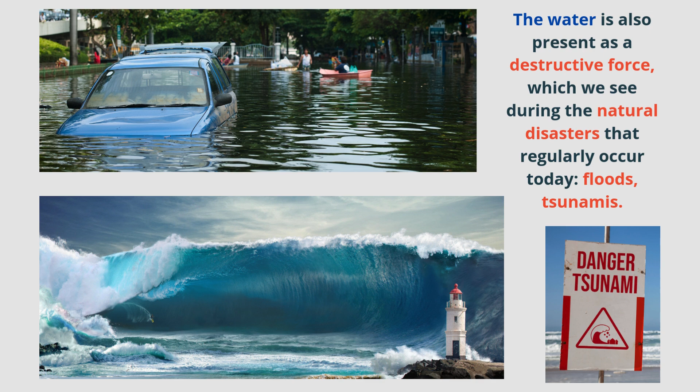The first civilizations developed next to water because it was used and is still used today as food, as an agricultural and industrial auxiliary material, and as a source of energy. The water is also present as a destructive force, which we see during the natural disasters that regularly occur today, floods, tsunamis. So man's relationship with water is twofold: to use the opportunities it offers and to protect against the threats it poses.

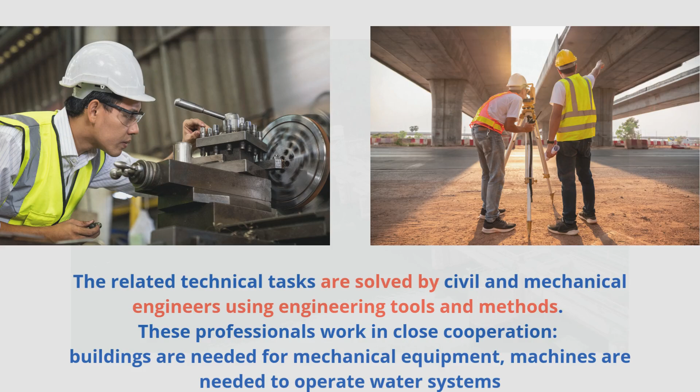The related technical tasks are solved by civil and mechanical engineers using engineering tools and methods. These professionals work in close cooperation. Buildings are needed for mechanical equipment. Machines are needed to operate water systems. Engineering work continues with the design of networks, artifacts, mechanical equipment, and buildings. They have to be built, assembled. The completed systems have to be operated, checked, maintained, and renovated. Engineers also carry out the research and development of new technical possibilities.

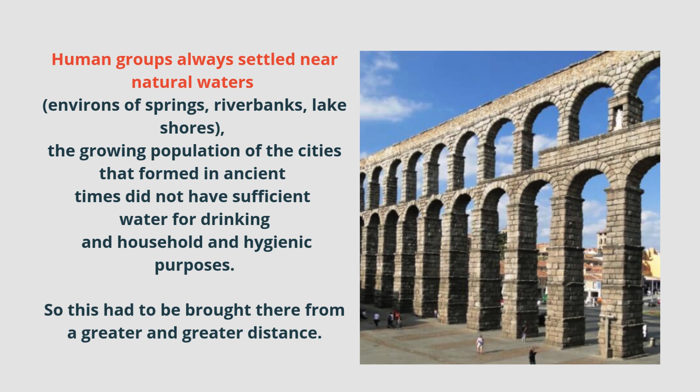Human groups always settled near natural waters, environs of springs, riverbanks, lake shores. The growing population of the cities that formed in ancient times did not have sufficient water for drinking and household and hygienic purposes, so this had to be brought there from a greater and greater distance. The aqueducts built by the Romans can still be seen today.

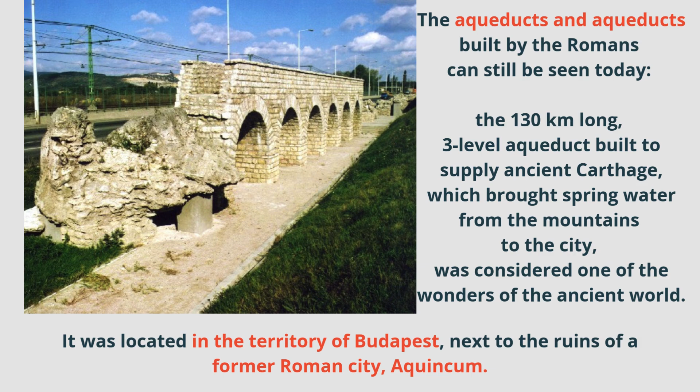The 130 kilometers long, 3-level aqueduct built to supply ancient Carthage, which brought spring water from the mountains to the city, was considered one of the wonders of the ancient world. It was located in the territory of Budapest, next to the ruins of a former Roman city, Aquincum. In addition to transporting fresh water, wastewater had to be removed. The remains of the first built sewer system, the Cloaca Maxima, Rome, can still be seen today.

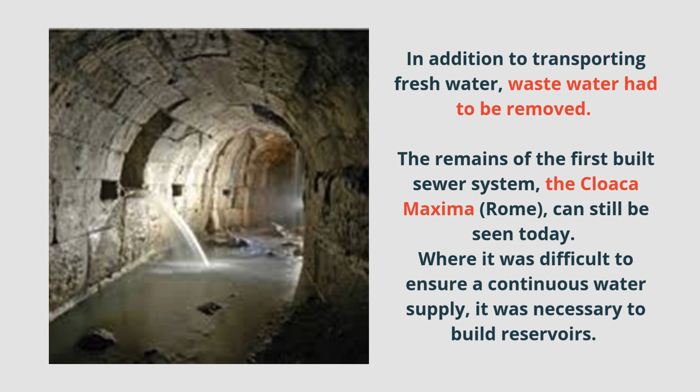Where it was difficult to ensure a continuous water supply, it was necessary to build reservoirs. Here, in addition to the architectural tasks, protection against leakage also had to be solved. The first such structures were the huge cisterns of the Masada fort on the shores of the Dead Sea, or the Chand Baori in India, which is a 13-story stepped storage well. At that time, no machine helped the water reach its destination. It was ensured by the properly designed slope of water pipes and canals under the influence of gravity.

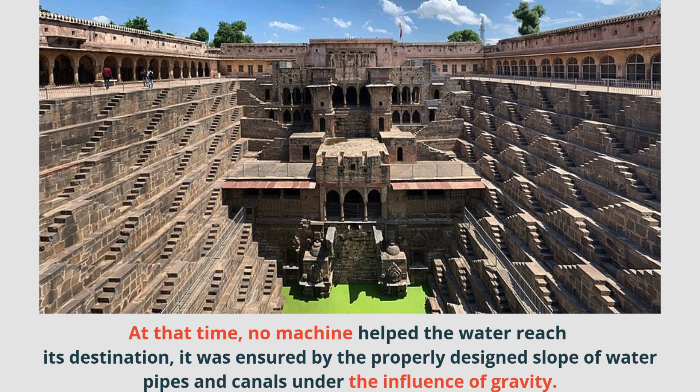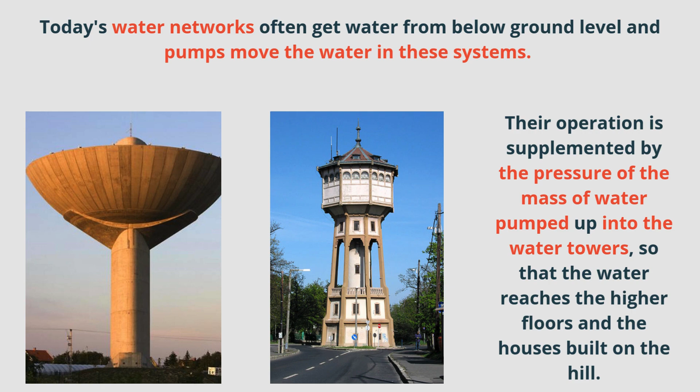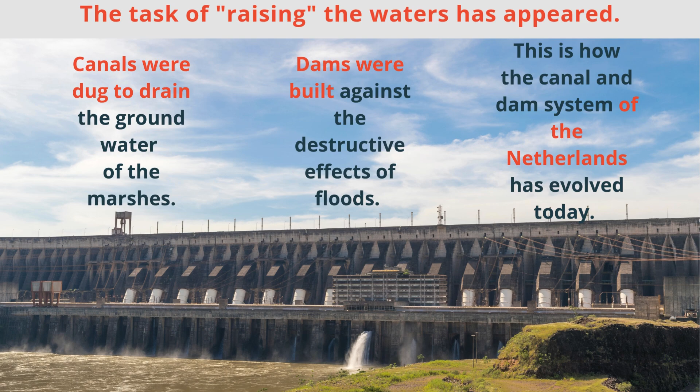Today's water networks often get water from below ground level, and pumps move the water in these systems. Their operation is supplemented by the pressure of the mass of water pumped up into the water towers, so that the water reaches the higher floors and the houses built on the hill. The task of raising the waters has appeared. Canals were dug to drain the groundwater of the marshes. Dams were built against the destructive effects of floods. This is how the canal and dam system of the Netherlands has evolved today.

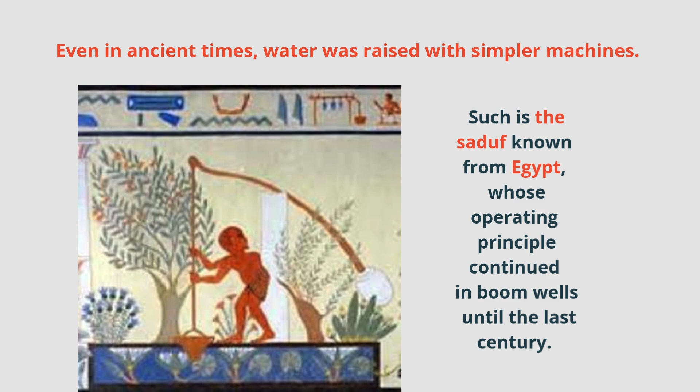Even in ancient times, water was raised with simpler machines. Such is the shaduf known from Egypt, whose operating principle continued in boom wells until the last century. Another technical solution is the Archimedean screw used by the Greeks, which is the oldest known pump. Despite its simplicity, this is still used today. A few years ago, a small hydropower plant was built in Hungary, in which 2 such structures were installed. They serve as turbines. That is, the water coming down from the higher level turns the spiral of the screws, and the rotational energy is converted into electric current.

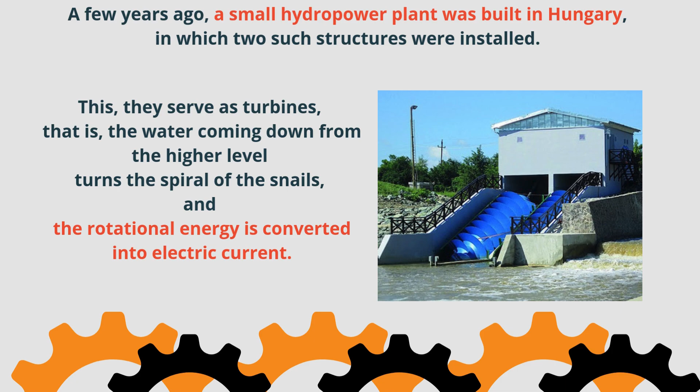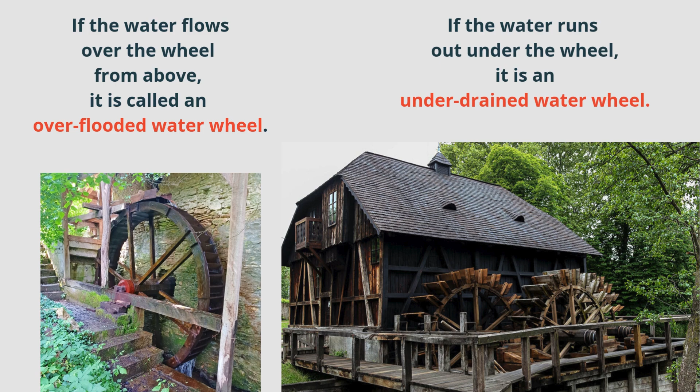The energy obtained from water could always be used favorably. Water wheels were built for this purpose. The water of the streams and rivers was either led to the wheel from above or flowed below it. So we speak of an overshot or undershot water wheel. If the water flows over the wheel from above, it is called an overshot water wheel. If the water runs out under the wheel, it is an undershot water wheel.

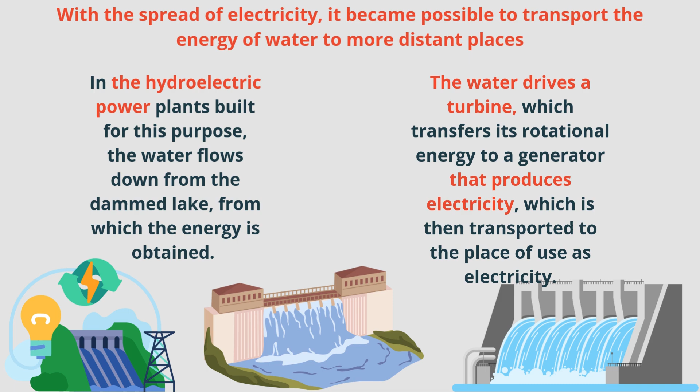With the spread of electricity, it became possible to transport the energy of water to more distant places. In the hydroelectric power plants built for this purpose, the water flows down from the dammed lake, from which the energy is obtained. The water drives a turbine, which transfers its rotational energy to a generator that produces electricity, which is then transported to the place of use. Tidal power is a modern type of hydropower. The electricity generated by power plants can be used further afield.

Due to the growing population and increasing industrial and agricultural activity, the demand for water is constantly increasing. Water-saving or recycling solutions come to the fore. Demands arising from changing attitudes will continue to pose new challenges for engineers in the future. It is more and more important to use water-saving solutions, to treat wastewater and, most importantly, to keep aquifers clean.